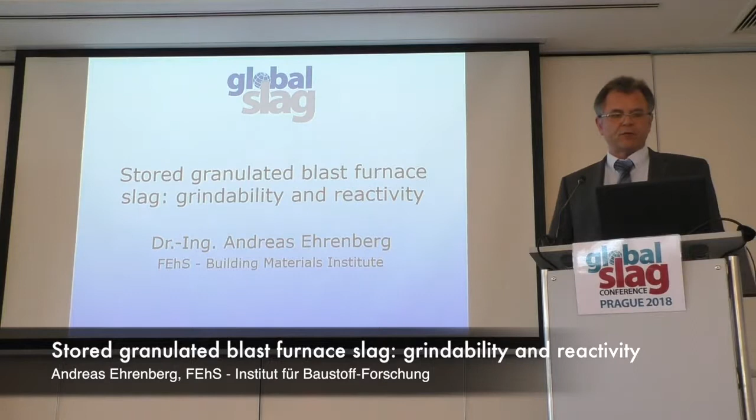Thank you very much. Stored granulated blast furnace slag: grindability and reactivity.

It's not really a new topic, but sometimes in our FEhS Institute we are surprised how often old topics, old questions arise again, coming from slag producers, cement producers, grinding facilities, trading companies, and so on.

Short overview: I will give some information on the background of the presentation and our investigation, an overview of what we did in the past, and of course I will inform on the results and give some conclusions.

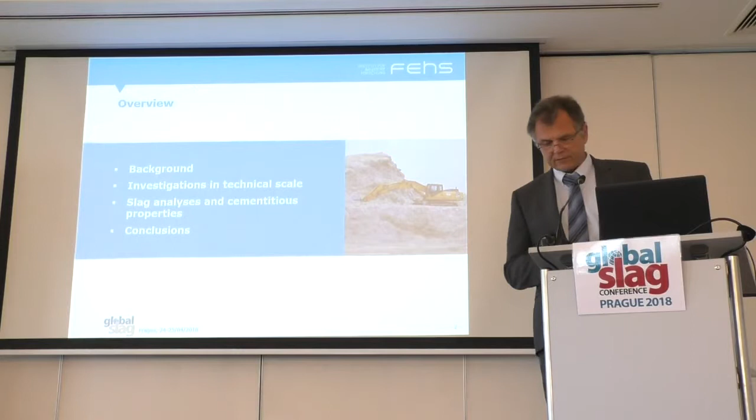Economical background, quite clear: normally we have a more or less stable hot metal production and also a stable granulated blast furnace slag production. In Germany, we have a granulation rate of about 90%.

But the customer in Germany, mainly the cement industry, has seasonal fluctuations. In wintertime, concreting is not so easy. Moreover, we sometimes have economical fluctuations.

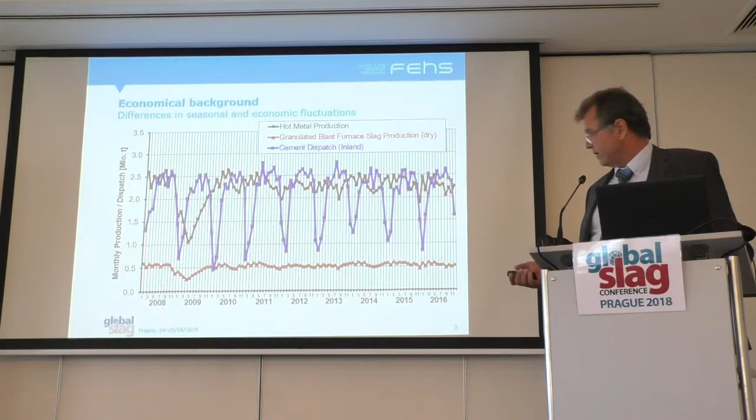As we had in 2008-9. And last year in Leuven, I heard the funny recommendation of a professor who said, okay, in the next years we will close all our blast furnaces, so GBS will vanish. So cement producers, store your GBS for high value applications for the next years.

Very funny, but at the end there is a need to store GBS for weeks, for months, and sometimes for years.

The technical background is that we already could show 10 years before that a GBS which is stored in moist condition outside will react, of course. You will know the hardening of GBS in a stockpile, and the reason for that is...

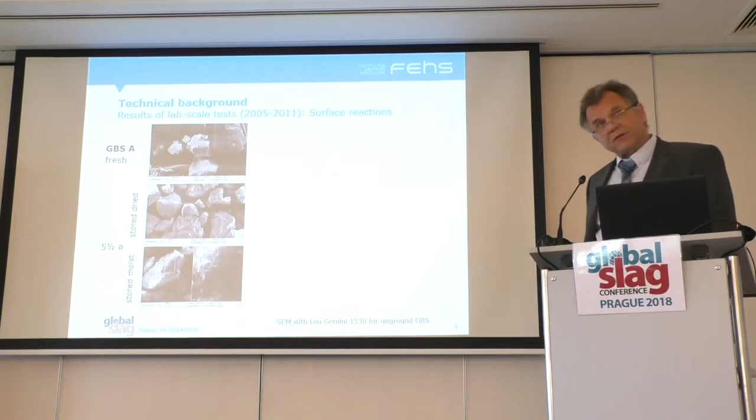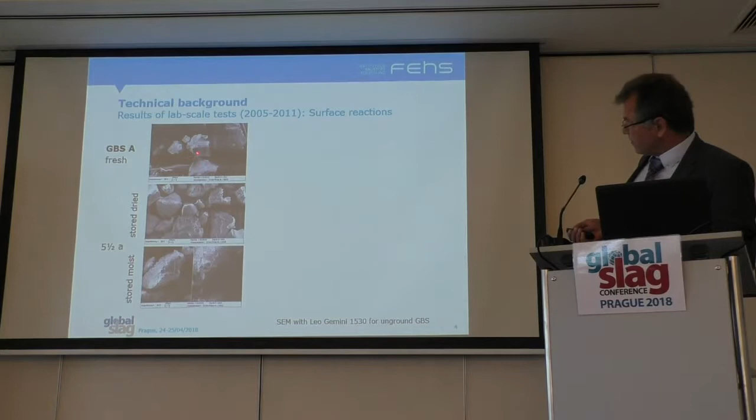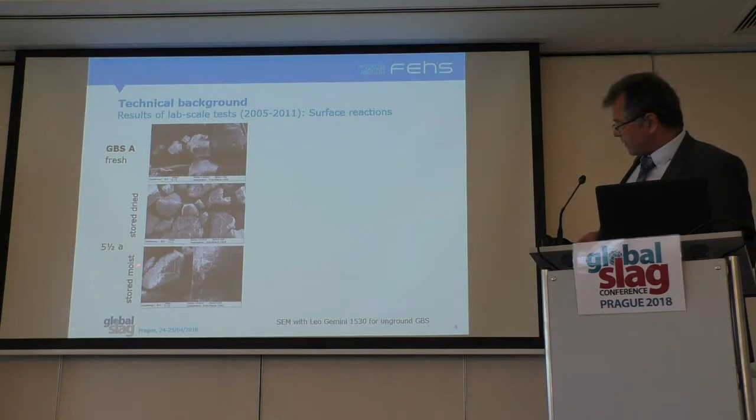GBS stored in our lab: fresh slag has a very smooth surface, and the same slag stored as dried material, in that case for more than 5 years, and stored in a moist condition as we received it.

What happens? At the surface of the grains you will find a lot of reaction products which are responsible for the hardening.

The question now is what happens regarding grindability and reactivity of this slag, if you grind this material as we did in our lab.

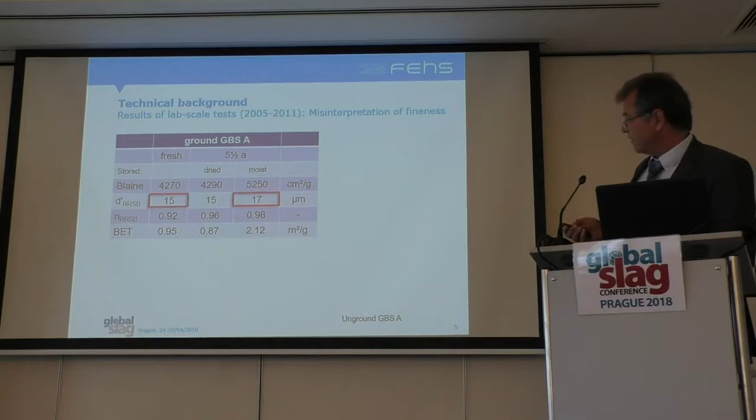Comparing the fresh slag and the stored slag, the dried slag and the moist slag, you will see that if we have the same particle size distribution, meaning the same fineness of the powder, you will have at the same time very different Blaine values.

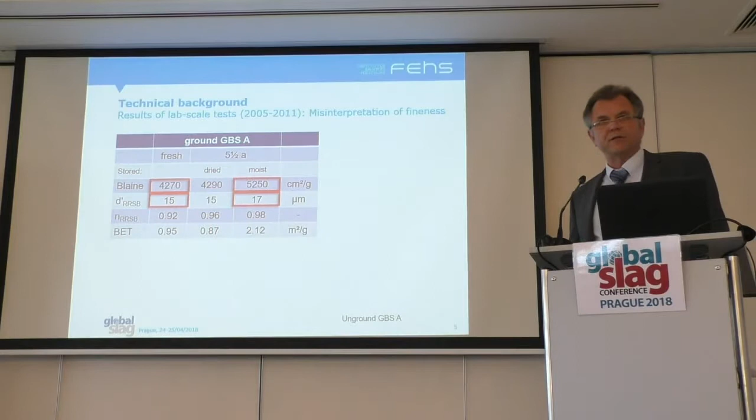The Blaine value is still a parameter often used in cement production. In reality, you stop your grinding process if you achieve a certain Blaine value, 4000 Blaine for example. In fact, you will have a coarser material.

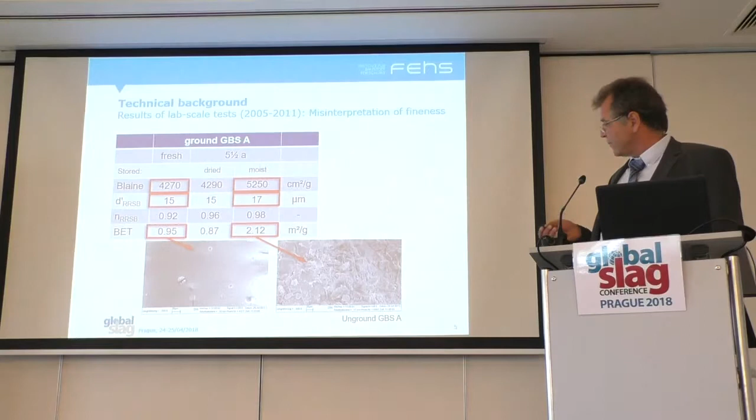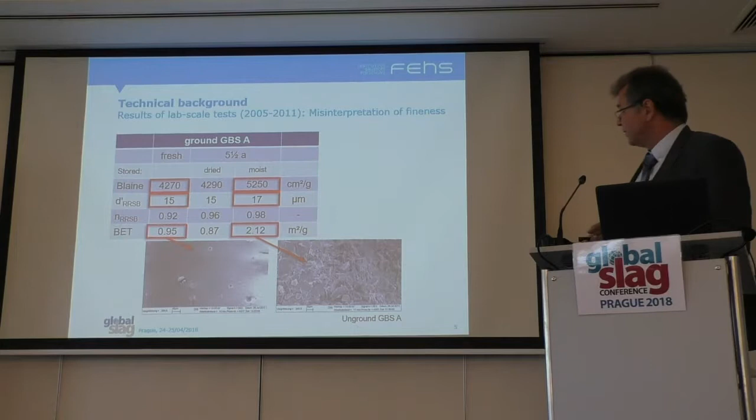That's a picture of the surfaces of unground slag: very smooth for fresh slag, and a reacted surface for the moist stored slag.

The result is a misinterpretation of fineness. That means the slag, if it is ground GBS, is coarser than normal, than expected.

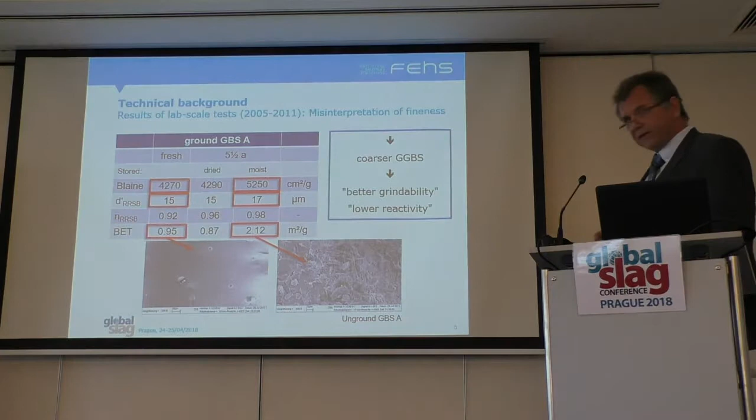So the feeling is you have a better grindability, but also you have a lower reactivity because, of course, a coarser material is less reactive. Very simple, based on lab scale tests.

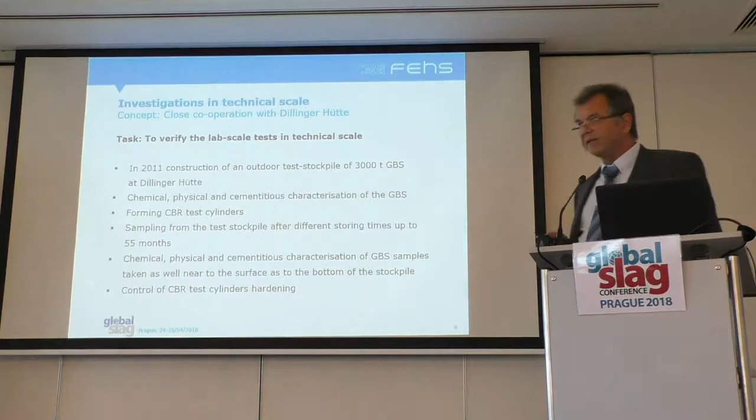In close cooperation with Dillinger Hütte, we started a project because the colleagues said, okay, that's very nice, it's lab scale results, but our cement industry customers asked the same question regarding technical scale. So we developed a project, and Dillinger Hütte started in 2011 to create a stockpile.

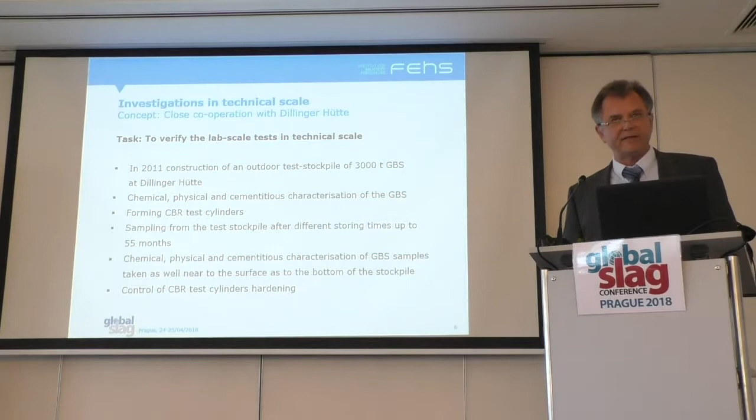A stockpile of 3,000 tons of compacted GBS. We made all chemical, physical and cementitious investigations in our own labs. We also formed CBR test cylinders in order to follow the hardening process.

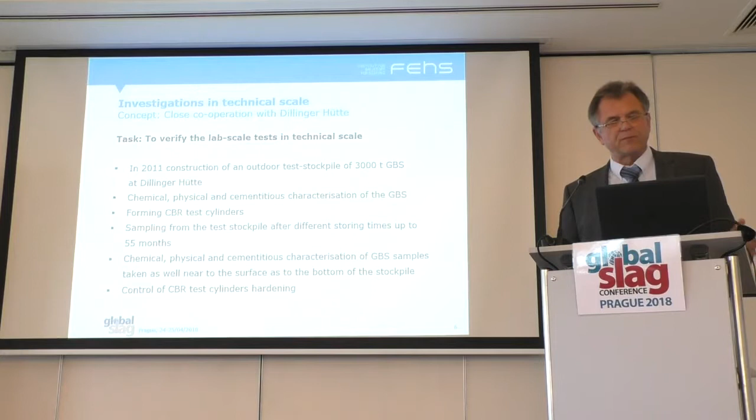And then from time to time we sampled from this stockpile, taking GBS samples from the bottom and also from the surface of the stockpile.

We started in January 2011 with creating the stockpile of GBS, compacting it in different layers. At the end, that was our test stockpile.

From time to time, as I mentioned, we took samples. The first time it was easy. After 3 months, my colleague was able to do it by hand. After 9 months, it was not so easy.

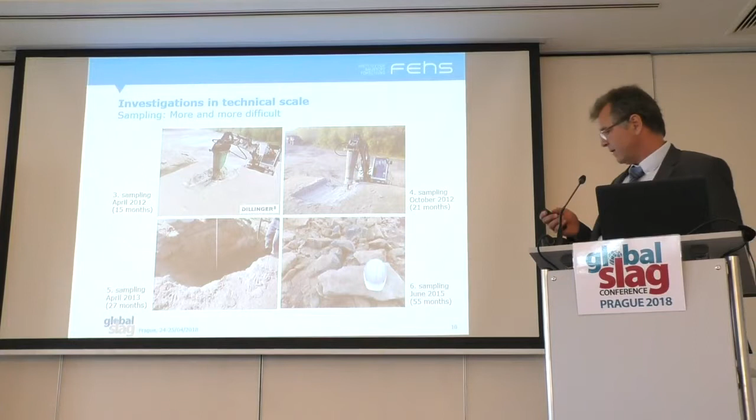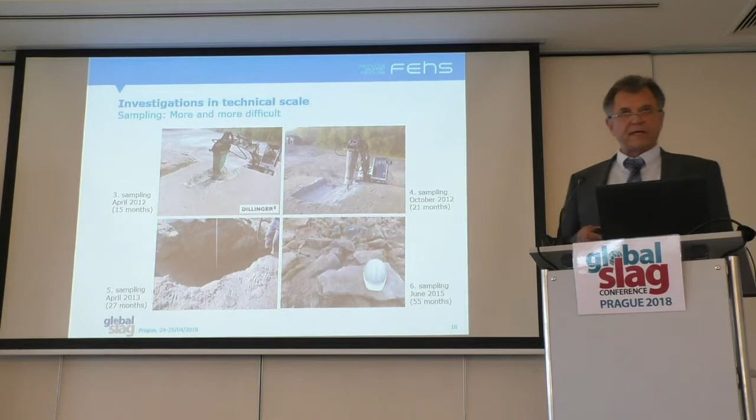After 15 months and later on, you can see it was really a problem to get samples from the bottom of the stockpile. At the end, after 55 months, we got unground GBS without any activation, which looks like fresh broken concrete made with slag cement. Nice blue color.

The chemical analysis of the fresh and also of the stored slag is typical for a European GBS. Not so bad, basicity 1.4, no special concentrations of main and minor constituents. So a normal GBS.

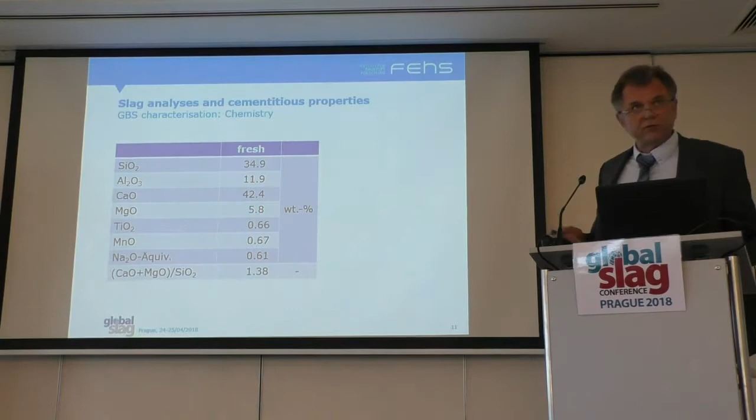There's no change during the storing time in chemistry itself. But what changed, and that's very interesting, is the content of chemical bound water and CO2 - not moisture, but chemical bound water in hydration phases. Starting from a low value, during the storing time the value for water increased to 2.3%, followed by an increase of the CO2 content because the pre-hydration products carbonate over time, so bound CO2 is increasing.

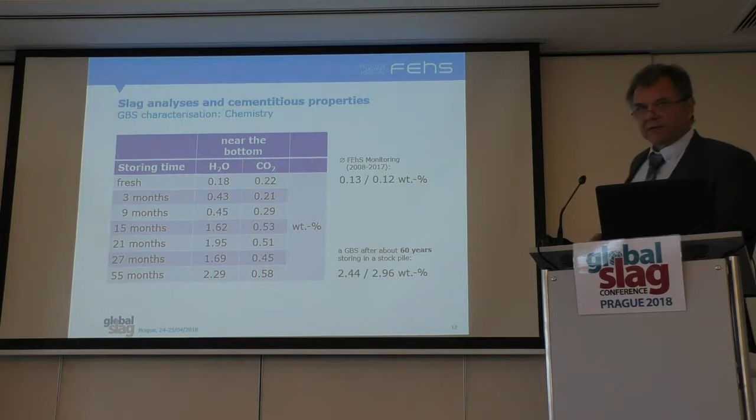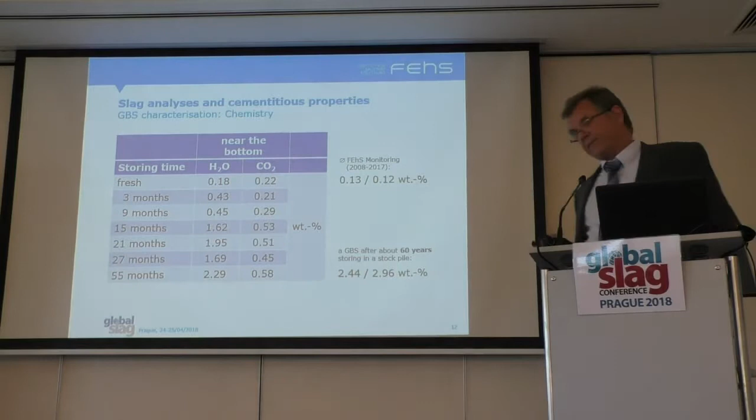If you compare the values of the fresh slag - typically twice a year we make a GBS monitoring for the members of FEhS, separately for each GBS from single blast furnaces - we get very similar values. To compare the values after 55 months, we have data for a GBS stored outside for 60 years. The water content is very similar, but the CO2 content is much higher.

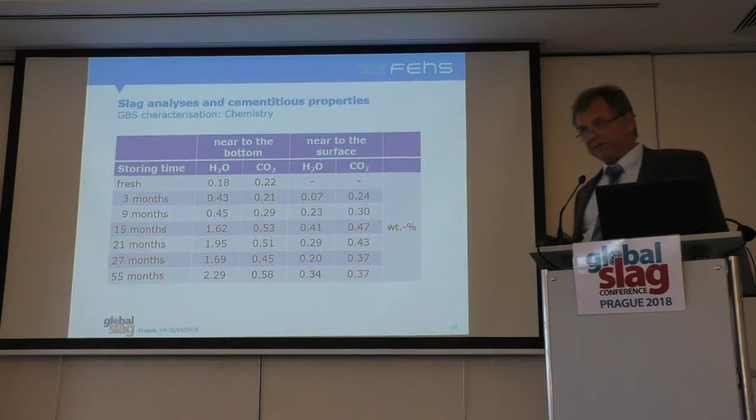So we really see the effect of long storing time in our sample. That's for the sample taken from the bottom. The samples taken near the surface show a similar trend, but due to storing conditions - dry, wet, hot, cold and so on - it's not so clear, and the chemical bound water and CO2 is not as high as for the main volume of slag inside the stockpile.

Chemistry and glass content, also glass structure, are the important things influencing the reactivity of a GBS, besides technical things like fineness and so on. So let's look at glass content.

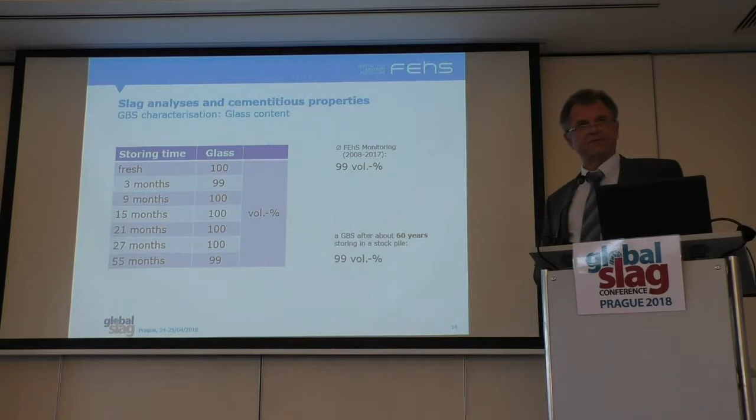Glass content, fresh slag and up to 55 months, no change. You cannot find any crystallization products, also not looking at X-ray diffraction. So one basis for reactivity is given also after a long storing time.

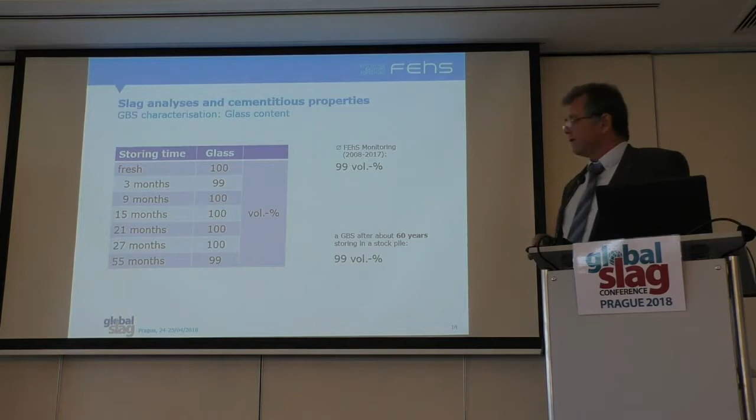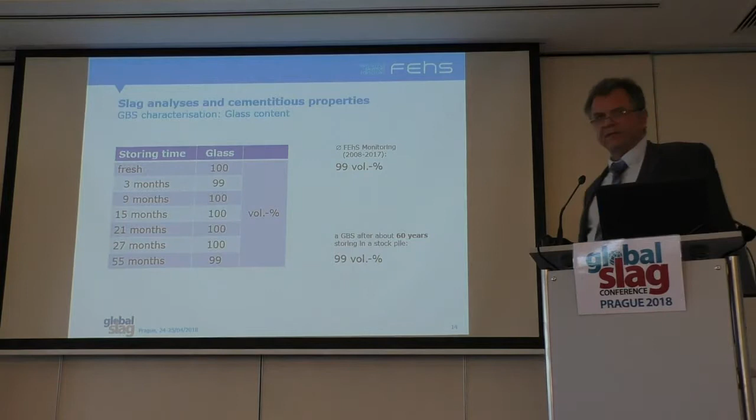The average value of our members' GBS is around 100% for fresh slag. And also after 60 years we found in another sample 99% glass.

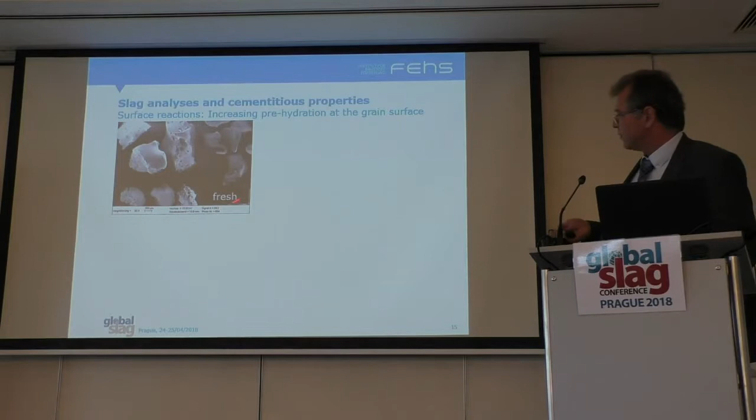Surface reactions. Let's look at the fresh GBS stored at Dillinger Hütte: sharp edge particles, smooth surface, a certain amount of pores. Normal. After 3 months, you can see surface reaction products.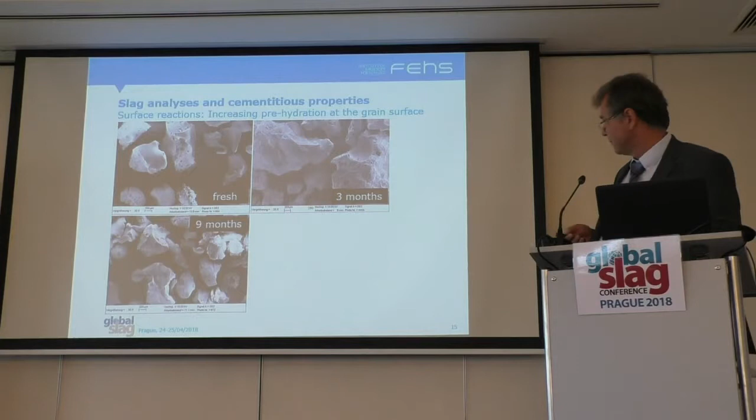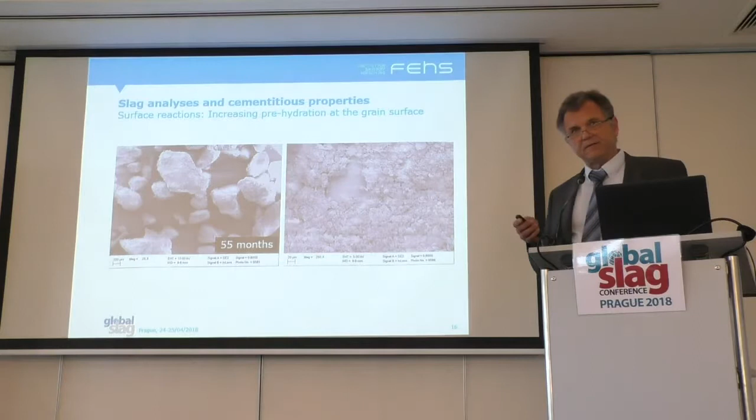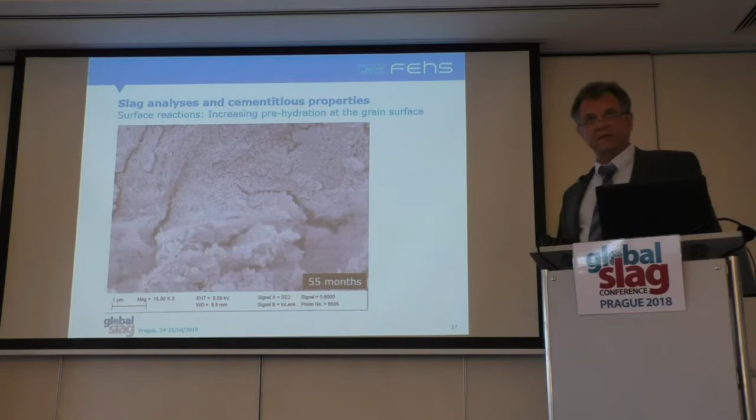Not so dense, but you can recognize them. After 9 months, more and more. And after 55 months, you have a very dense layer of reaction products, very fine products at the surfaces, responsible for the hardening of the slag. The scale is 1 micron, so a lot of CSH phases in nanoscale, very dense.

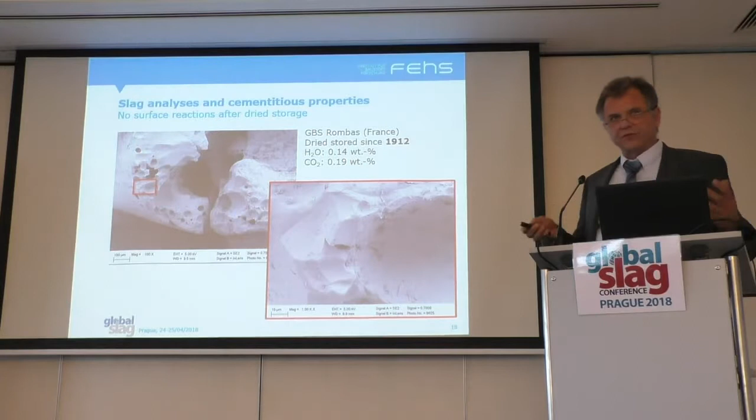If we compare such pictures, we chose a very old GBS, the eldest slag we have stored in our institute, coming from 1912 in France, stored in a dried way. Today it has very low values and a very smooth, unreacted surface. So it is moist condition which is responsible for the hydration, of course.

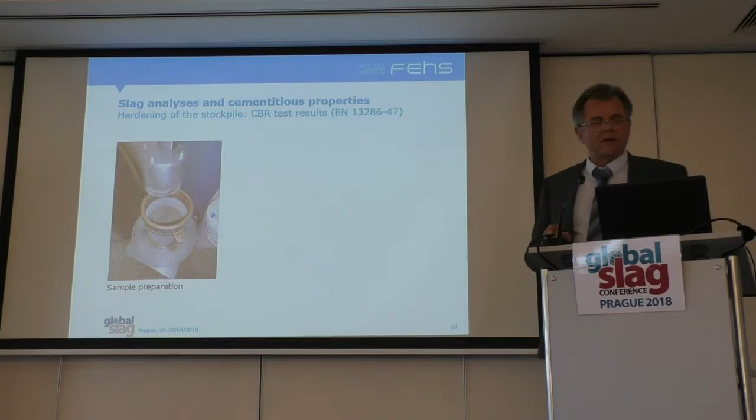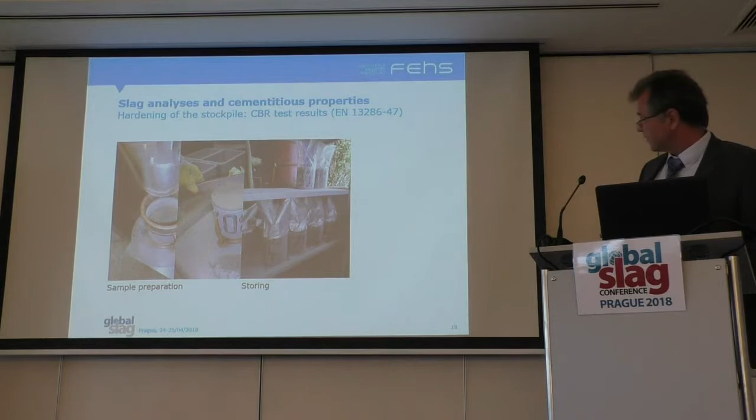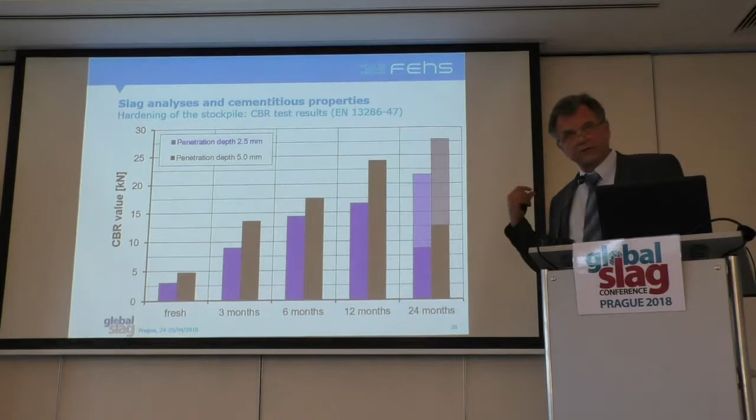To follow the hardening process, we produced CBR test specimens, proctor samples, prepared with unground slag with a certain moisture, protected against water loss outside, and tested from time to time. That is a sample after 2 years. The values clearly follow the hardening process outside, which you could recognize in the pictures shown earlier in the presentation.

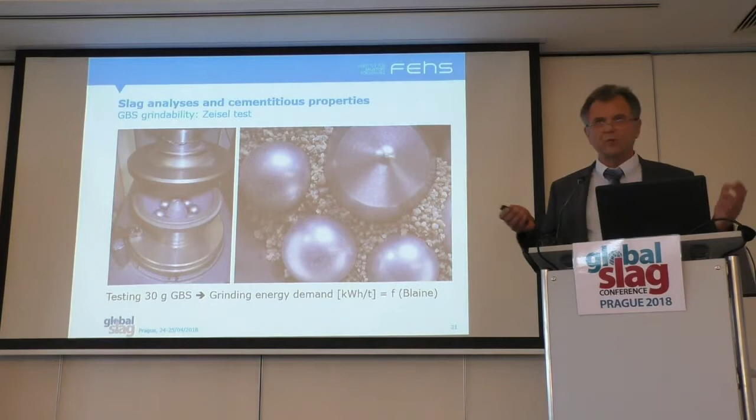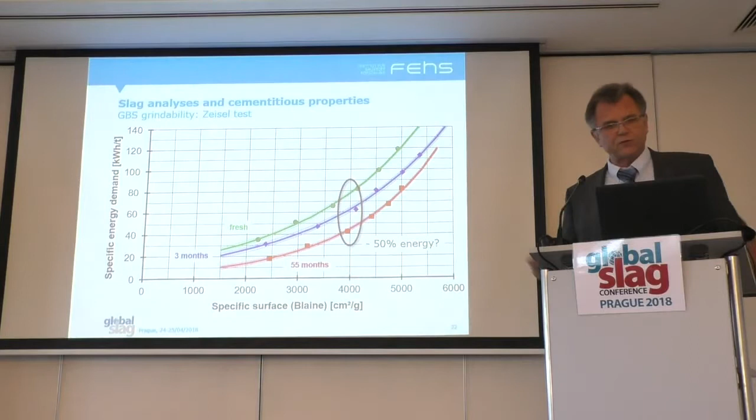Grindability. We test grindability in the Institute with a so-called Zeisel test. It's a small closed ball mill using 30 grams of material, and as a result you get a curve of grinding energy demand in kilowatt hours per ton depending on the Blaine value. When we measured fresh slags and stored slags according to the Zeisel test method and the Blaine value, it would be very nice - at 4000 Blaine, a typical cementitious fineness.

We need only 50% of grinding energy. But looking at the real fineness, the particle size distribution, we see that's the starting point - the fresh slag after the Zeisel test, around 5000 Blaine. After 3 months, after the same test, we have 400 Blaine more. But we have at least a very similar particle size distribution.

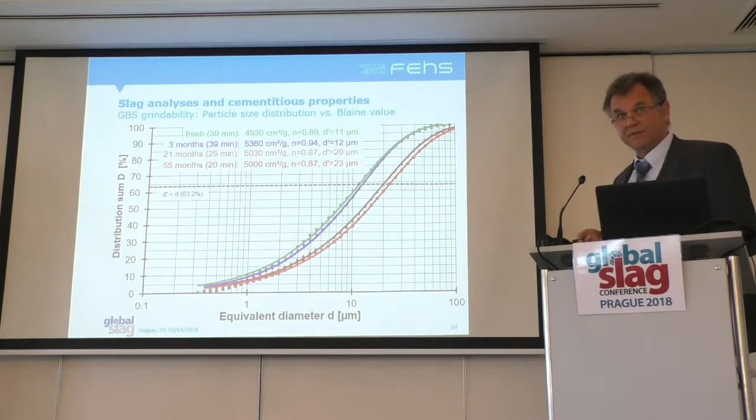At the end of the storage, we got the same 5000 Blaine already after 20 minutes grinding instead of 39 minutes, which means half the time. But the material is much coarser. So according to Blaine, you save a lot of grinding energy, but according to fineness, you have a coarser material. And therefore, there is no better grindability.

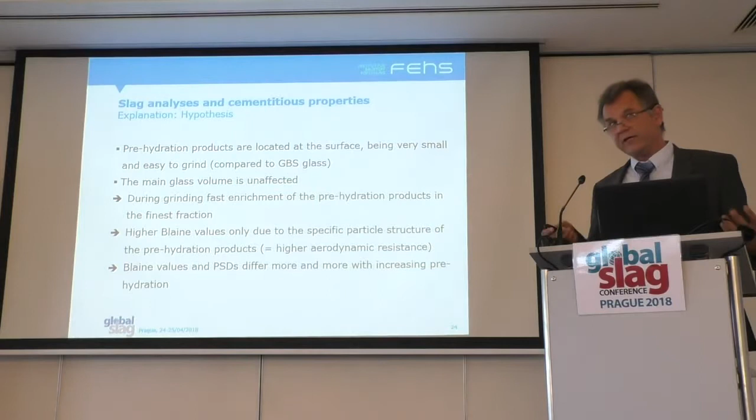The explanation - we made a hypothesis. Pre-hydration products are located at the surface, as we saw, and the main glass volume is unaffected, as we measured. So we think during the grinding process we have a very fast enrichment of the pre-hydrated surface. Therefore we get very fast, very high Blaine values, and we see that between Blaine value and particle size, real fineness, there is an increasing difference.

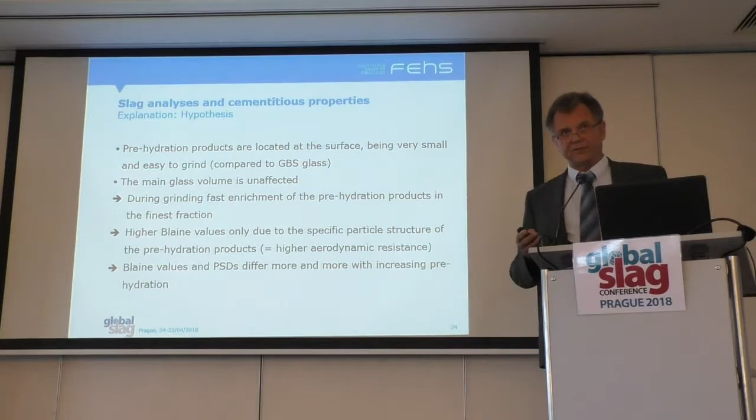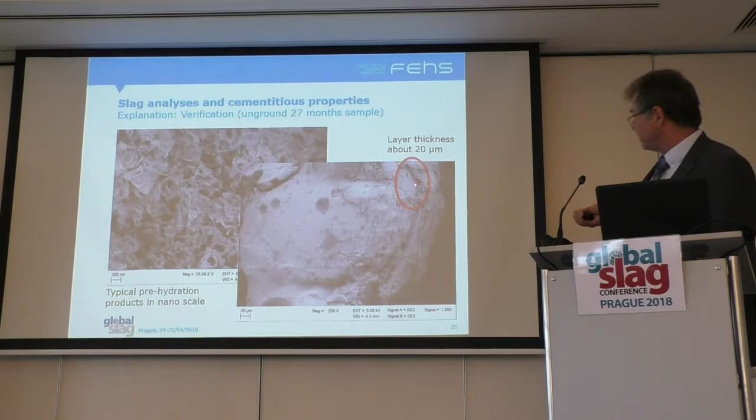That's typical pre-hydration products in nanoscale at the surface. If you look at the thickness of this layer, it's only about 10 to 20 microns. And the main volume of the GBS grain, as you can see here, is unaffected by any storing conditions.

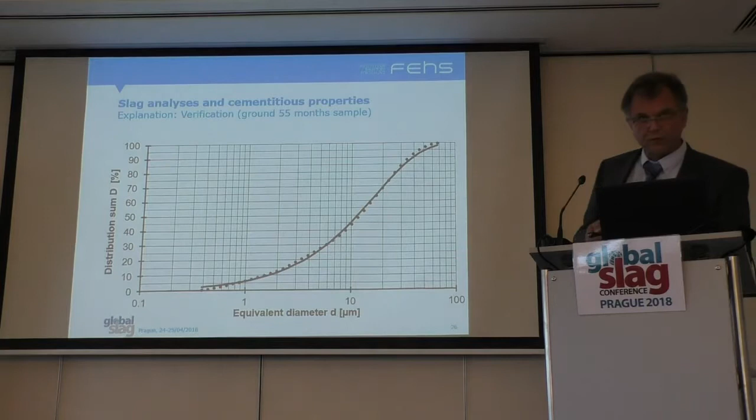So what we did, we separated the ground GBS, which was stored for 55 months, into different fractions. The smallest sieve we have is 20 microns, and we analyzed separately the chemical bound water and CO2.

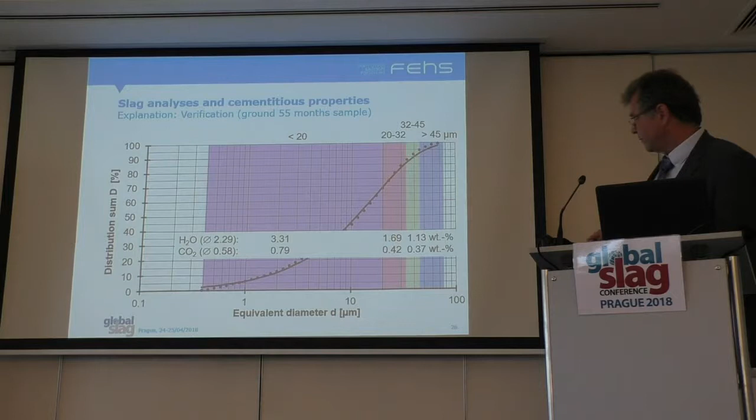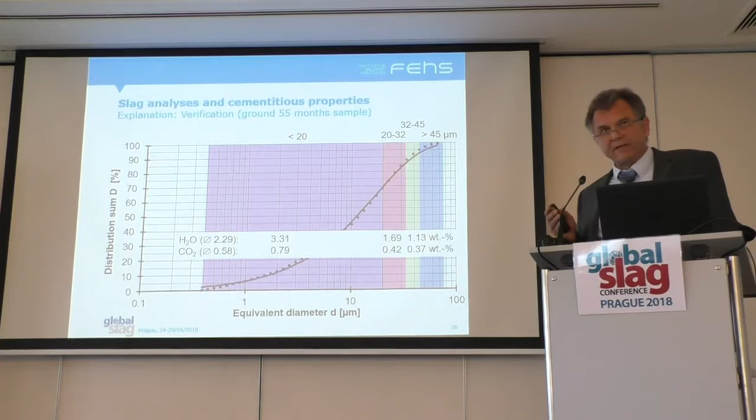And surprise, if you have finer material, the chemical bound water content is higher, also CO2. I'm really sure that if we separated the normally very reactive fraction of GBS below 6 microns, we would find much higher values. So in the fines, there is an enrichment of the inert prehydrated products.

Looking at cementitious properties, we always at the Institute try to adjust a comparable particle size distribution, also in our project here. That's our starting point, fresh slag, about 4,120 Blaine. The green curve is somewhere in the middle.

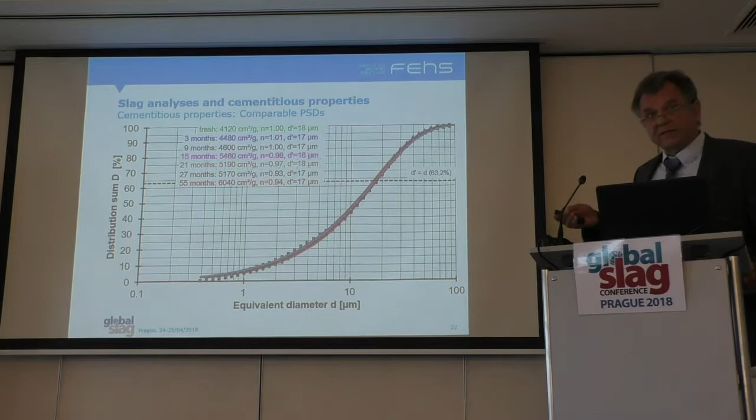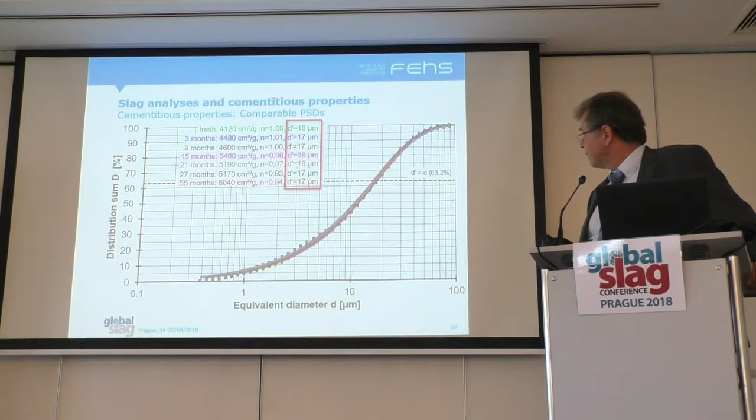And here we see the different values for the stored slags. In fact, we have a very similar particle size distribution, but very different Blaine values. But we ignored the Blaine values. For us, it is important to have the same PSD.

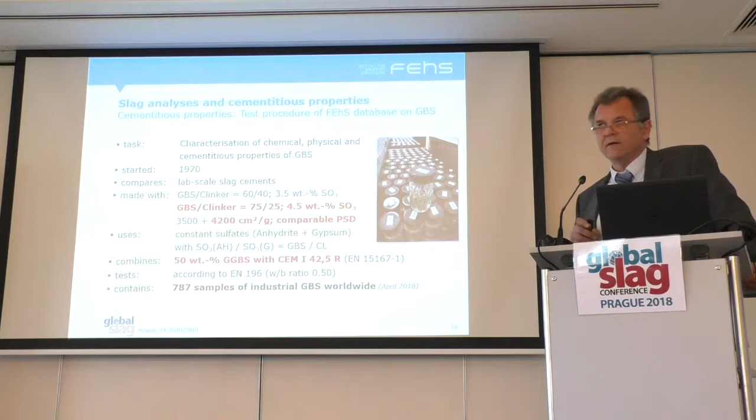The ground material we took and investigated the cementitious properties according to a procedure introduced in our institute in 1970, in order to characterize any GBS from somewhere. Today we investigate mixtures of 75% GBS, 25% clinker, and since the year 2000 we use really the same clinker.

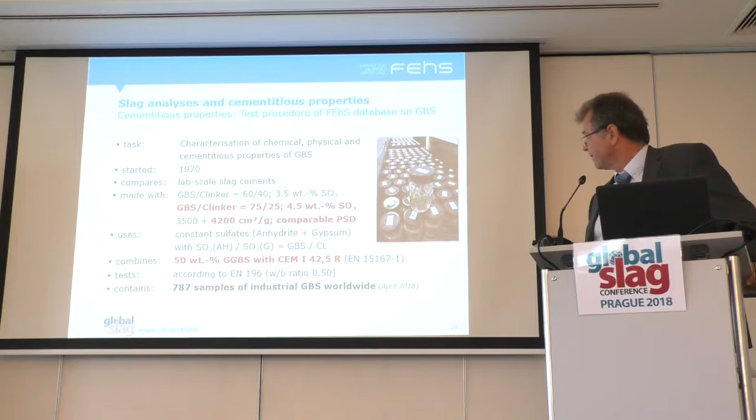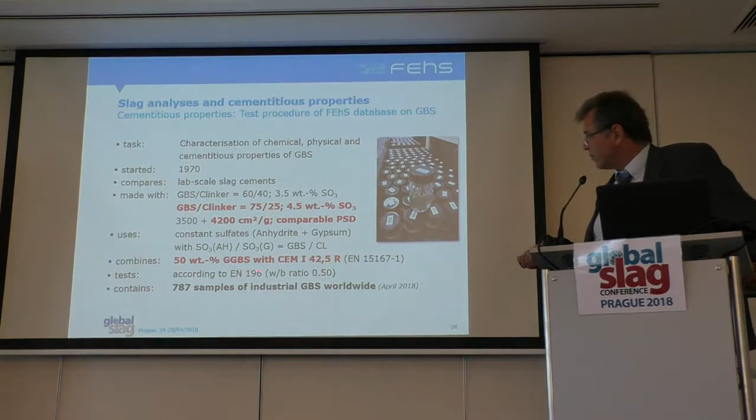The same sample, 2 tons of clinker which we stored in our institute. We normally install a comparable PSD, which is for a fresh slag about 4,200 Blaine. We use the same sulfates, the same sulfate concentration, and we make 50-50 mixtures according to the European GGBS standard.

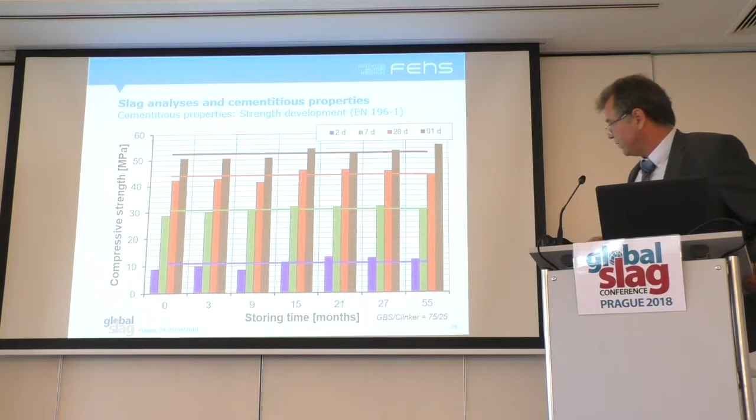In the meantime we have about 800 samples of industrial GBS coming from all over the world, analyzed according to the same procedure. These samples also come from Delhi. What you can see here, we made mortar tests according to the European standard, using 75% ground GBS, 25% clinker, looking at the mortar strength after 2 days, 7 days, 28 days.

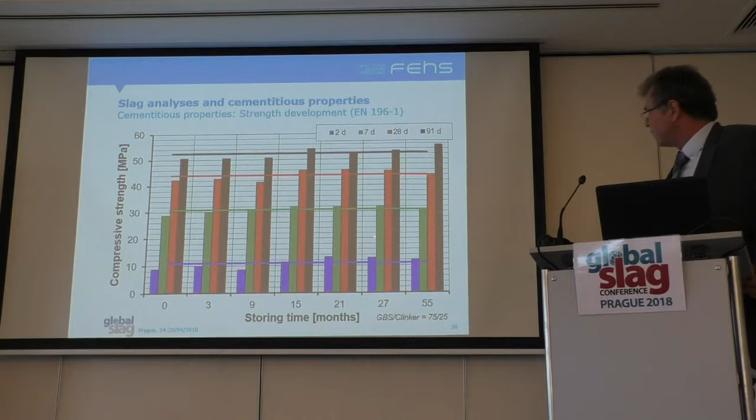91 days. And what you can see here, the lines are the average values, and the individual values are very near the average. That means there is no loss in strength, no less reactivity, if you guarantee that you have really a comparable fineness - not a comparable Blaine value, but a comparable fineness.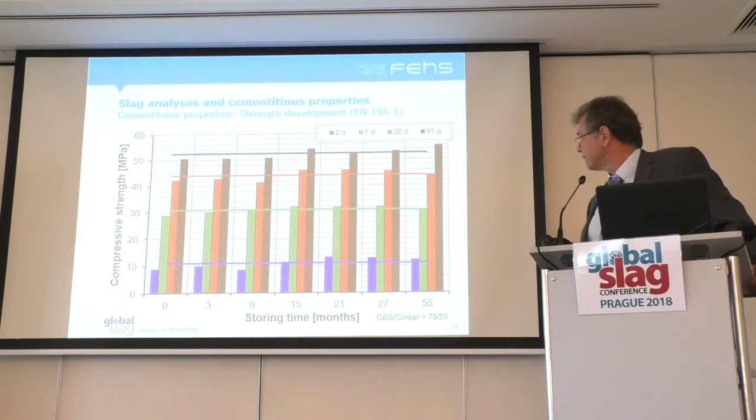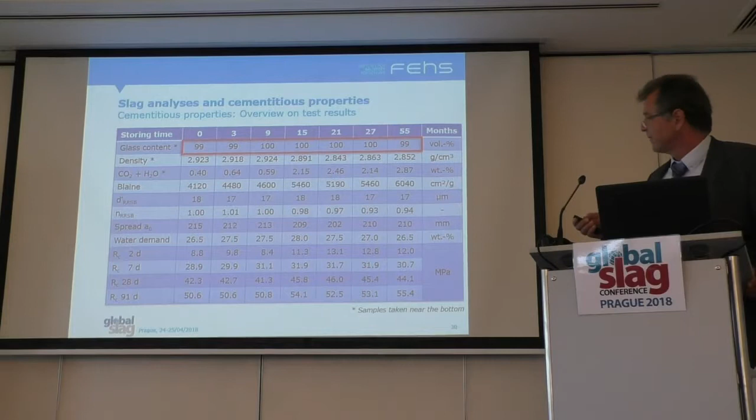All results in one table. Glass content not affected. Density is a simple parameter to measure. Due to the prehydration, you find a decreasing true density of the material.

Strongly increasing contents of water and CO2 - a very good and easy to measure indicator for the age of a slag. The Blaine value has nothing to do with the true fineness of the material.

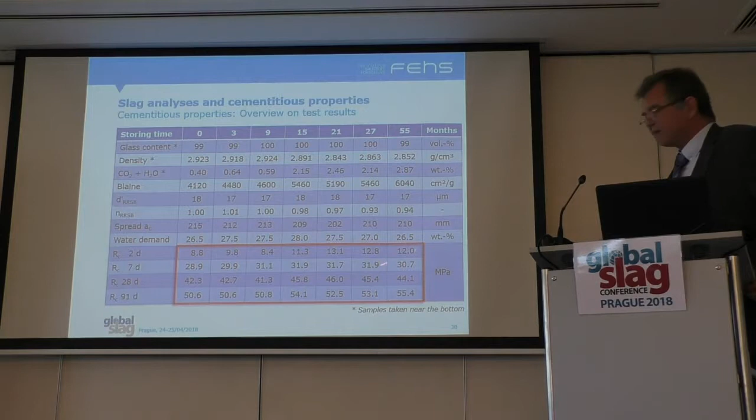Workability of the mortars, in fact, not affected. Strength - we can see maybe a little bit higher early strength, but in any case we do not see a lower strength development.

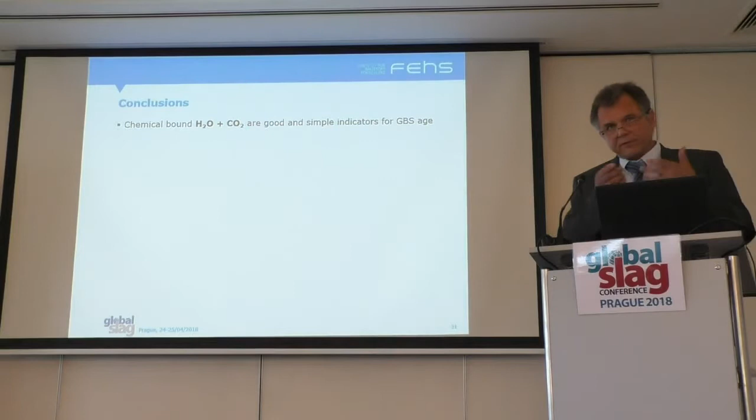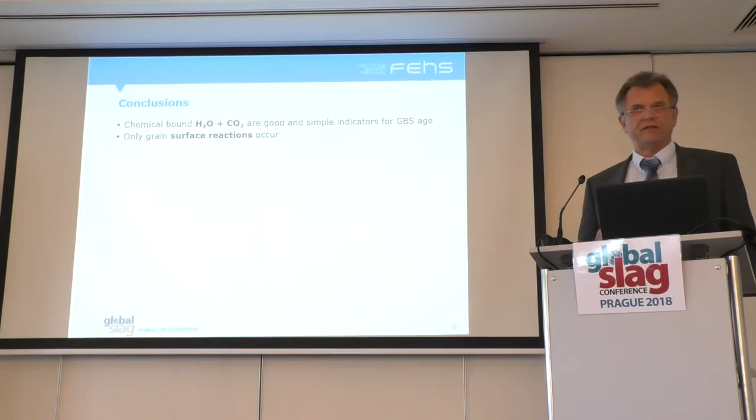Let's come to the conclusions. Chemical bound CO2 and water are very good and simple indicators to have a first evaluation of an unknown GBS coming from somewhere and stored for an unknown time. We see also that even after many years, there are only surface reactions at the micron scale.

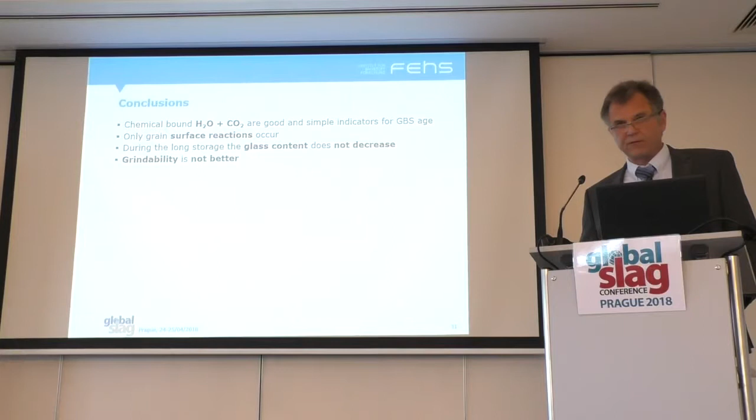Glass content will be as high as it was at the beginning of the storing. There is no better grindability. And if the PSD is constant, the Blaine value will increase enormously. But the strength development based on constant fineness will be more or less also constant.

Maybe there are some positive nucleation effects - you saw a slightly higher 2 day strength. And maybe we have to adjust a little bit the PSD in the finer range, but that's not the most important topic.

So again, if you grind stored GBS for cementitious purposes, look to the PSD, don't look to the Blaine value, and then you will have a reactive slag which will be as reactive as glass content and chemistry can offer.

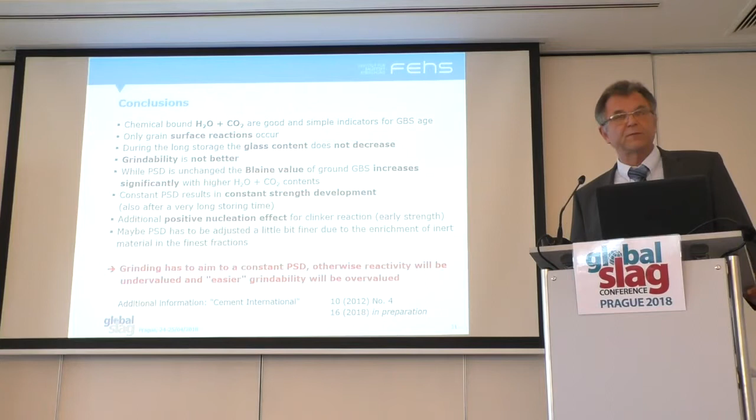Additional information you will find in Cement International. The lab scale tests were already described in 2012, and the last industrial results will be presented this year also in Cement International. That's it, thank you for your attention.

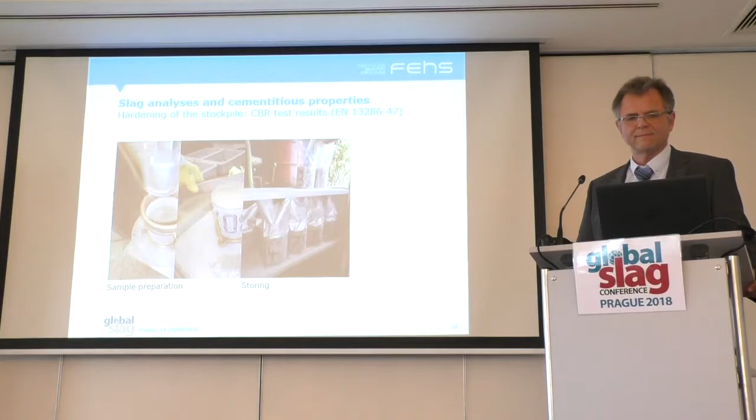In the Gulf, temperature is 50 degrees. So if I go back to your slide - if I go back to the first two or three slides, you are doing all your tests considering storing the slag in a moist environment. In our case, when we store the slag, temperature is 45-50 degrees, so we're storing it in a very dry environment. Do you think the end results will be the same if you store it in a very dry environment?

I presume yes, because most of the moisture is not coming from the rain.

It's coming from the slag itself. If it is leaving the steel plant, it will have maybe 10%, sometimes more, sometimes less, water content, and the slag is more or less porous. The water which is in the pores will not come out independent from the conditions in the main part of the stockpile. In the outer part, 20 centimeters, half a meter, whatever, there will be a drying, of course, and there will not be such a reaction and not such a hardening. But at the end, the most volume of the slag, I presume, will show the same behavior as we saw in that case.

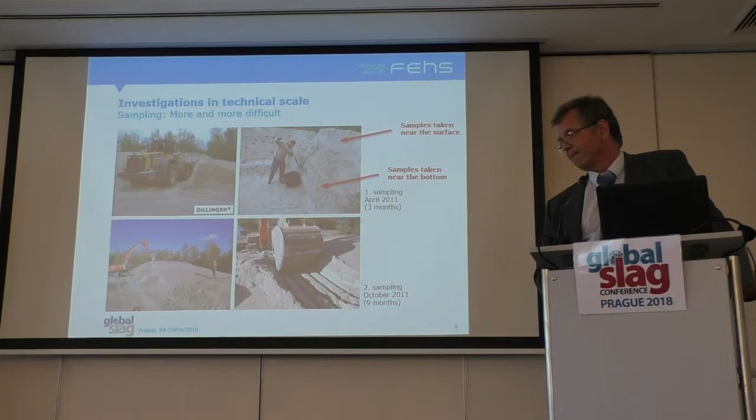Okay, very quick question on the Slido. Just actually alluding to this slide, why was the storage pile compacted when the pile was formed? Is this actually a normal practice on an industrial scale?

No, it is only to simulate not having 3,000 tons, but maybe 500,000 tons. That's the only thing. It's only if you have a big storage, which we had in the past sometimes in steel plants—you have not 3,000 tons, but much more and much higher stockpiles. Therefore, the pressure inside the stockpiles will be higher than if you only add 3,000 tons on a small hill. So it's only to simulate a little bit the real conditions in big stockpiles.

Right, and also on that topic, you found quite a large difference in hardening effects between the top of the pile and the bottom of the pile. Yeah.

So the final table that you gave us with the strength development, is that based on samples taken from the bottom of the pile or the top of the pile? All results are considering only the samples taken from the bottom, because in the outer part you have indeed drying—in summertime, sometimes it's raining and so on—so the effect, also the chemical effect, the prehydration effect, is much lower. Therefore we look to the main part, let me say, of the slag, which we took from the bottom.

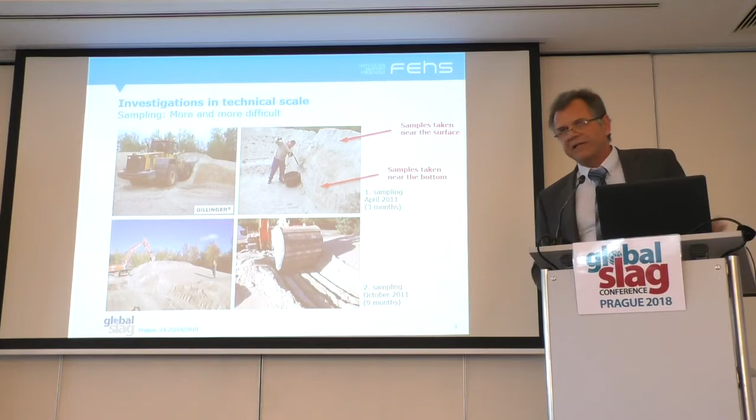Just to finalise the discussion, I wonder what the total change per particle of granulated blast furnace slag is, that has reacted over time. If you imagine equating it with the planet, the amount reacted is equivalent to the atmosphere—a tiny, tiny thickness on the surface of the particle, which is less than a tenth or a hundredth of a percent of the overall particle size.